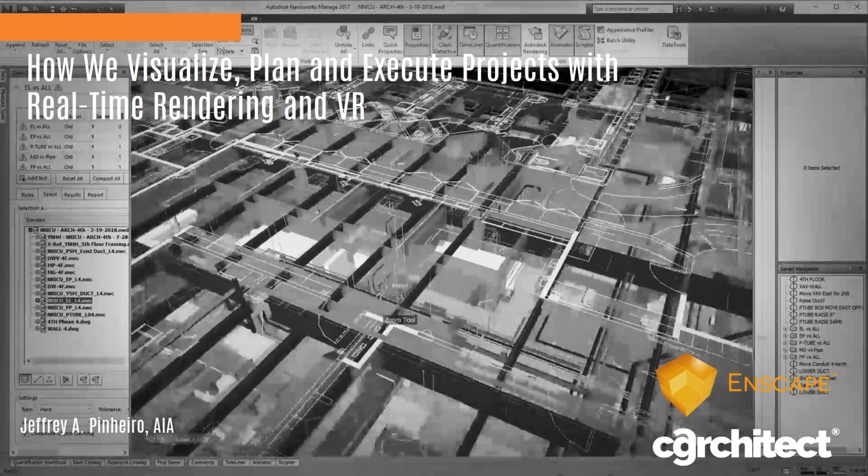So introduction for Jeff. Jeff has 16 years of experience in a variety of roles in the industry. He's a registered architect in the state of Connecticut, and he currently holds the position of regional VDC manager at Turner Construction. Many of you may also know Jeff as the Revit Kid, which is a worldwide online resource for all things Revit and BIM, and through his BIM After Dark community.

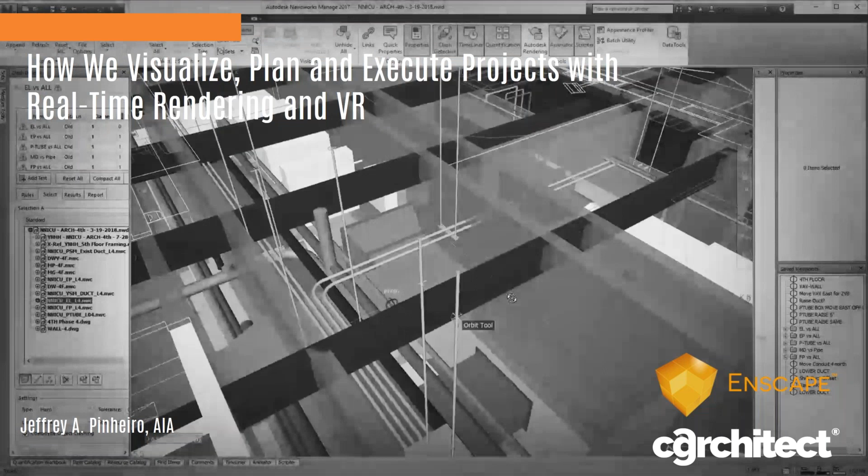Well, thanks everyone. As Jeff mentioned, this is kind of a follow-up almost to the presentation last November. If you haven't checked that out, check it out. That one was heavily placed on VR and virtual reality, but this one is going to be neat. I think a lot of people will find some value in getting a better understanding of how we, as a construction management company, are actually utilizing real-time rendering tools, including Enscape.

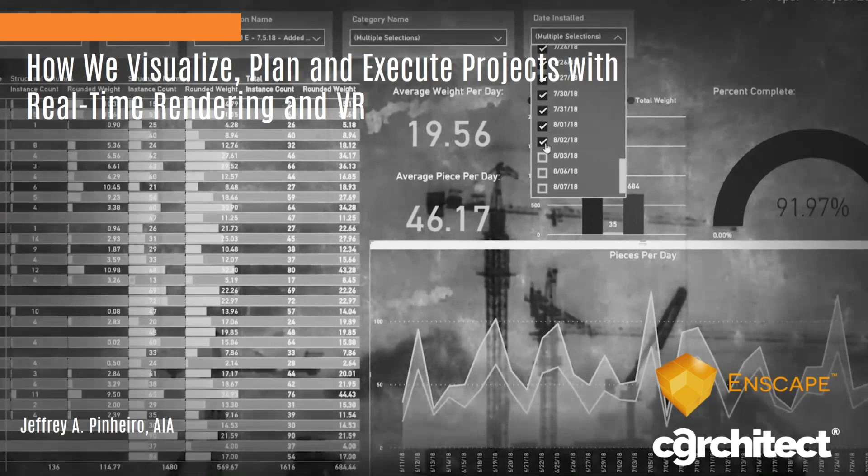And I do want to apologize ahead of time. Of course, luck would have it, I'm getting my roof redone on my house, and because of weather, they're doing it today. It sounds like they're on lunch break, so I'm hoping that they stay on lunch break. But if you hear a bunch of banging, I'm okay. I'm going to try to keep the microphone low and keep my mouth close to it. So I apologize, but this is the world we live in, working from home, right?

Just a quick little overview on myself. If you guys don't know, Jeff did a great introduction, so thanks for that. As far as my background, just to give you a little bit of understanding of where I come from and how I got to where I am today - as you can see, I have a master's of architecture. I'm a registered architect, but I did, in my past, take a minor in construction management. So there's always a piece of me that understood the value and was interested in not just the designy, visual side of architecture, but also in the construction management and business side of it.

As far as what I've done over the last 16 years, I was fortunate enough to go to a vocational school. I studied architecture in high school, and I actually started working at a firm in high school. So I've actually only ever held a job at an architecture, engineering, or construction firm my entire life. I think I spent maybe 2 weeks working with my father at an auto body shop, and that was it. So kind of a unique experience.

As Jeff mentioned, I'm the regional VDC manager, which we'll talk all about throughout this presentation, but it stands for Virtual Design and Construction. I'm an adjunct professor at the University of Hartford, 6 years running, which is awesome. And then, of course, as Jeff mentioned, I also run RevitKid.com, which is over 11 or 12 years now we've been doing that. It just rolled over, I think, the 12-year anniversary, and I completely forgot about it. And then also, I've been hosting live online YouTube streams every week since the beginning of the pandemic. So we're on week 40-something now. Check those out, it's called BIM After Dark Live.

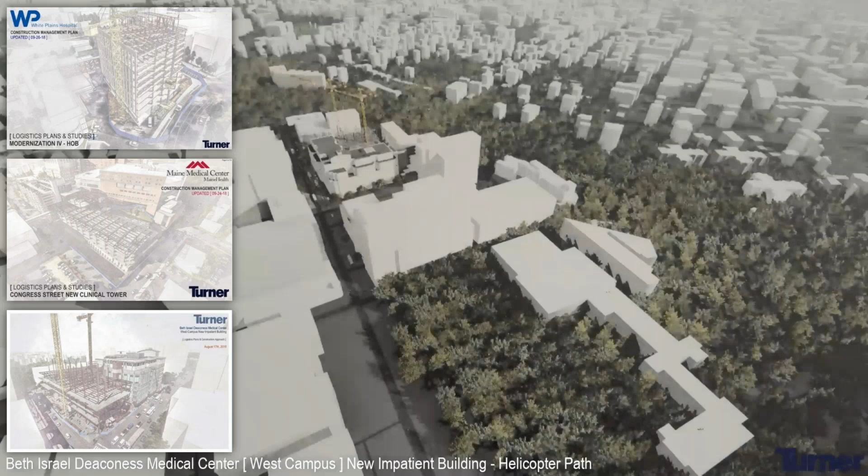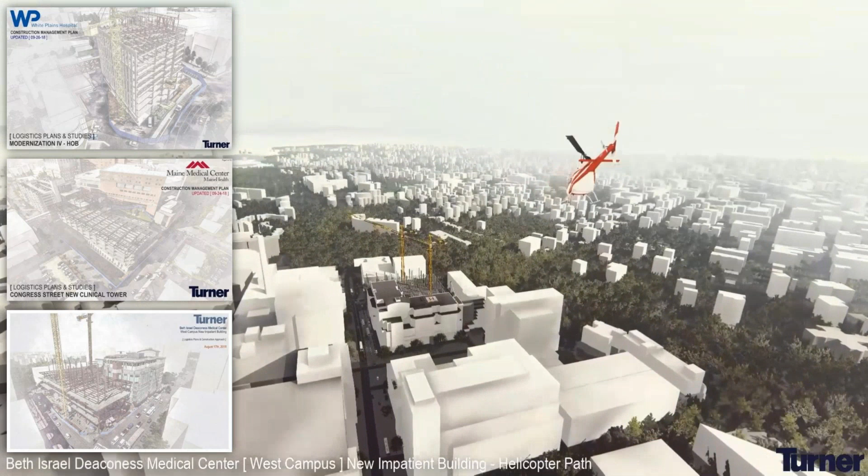So a big chunk of the focus today is on logistics and planning. For anyone who doesn't know what a logistics plan is, maybe you've seen something like these - not the animation of the helicopter, but on the left-hand side, these are called construction management plans. These are actually required by a lot of towns and cities we work with before we build - the submission of a construction management plan.

Usually they're narratives, very long narratives explaining phases of the job and all kinds of important information. But what we do is supplement those with images. The video you saw was an animation we made showing the helicopter path based on the two tower cranes we were putting on a job outside of downtown Boston.

These are used for so many different things. They're used to explain to the city or town what it's going to look like during this phase, or to talk with subcontractors about pricing and coordination between crews, and to highlight really important things.

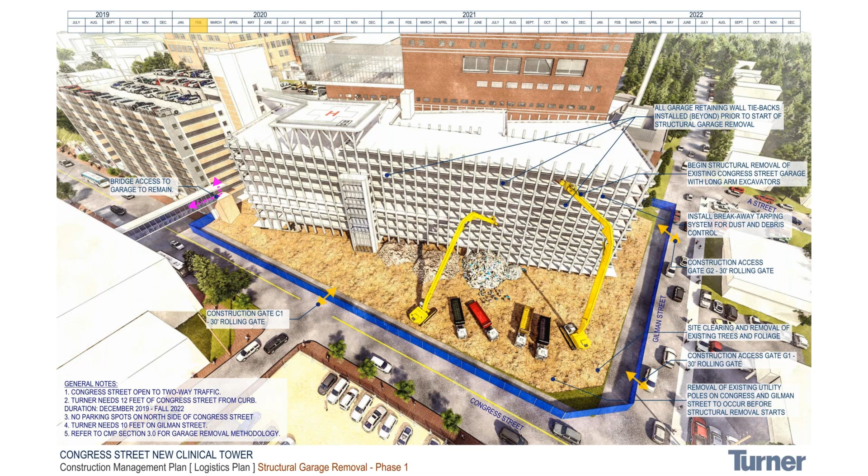You can see within the general notes here, this is actually the demolition of an existing garage that's making way for a brand new building, and there's a lot going on here.

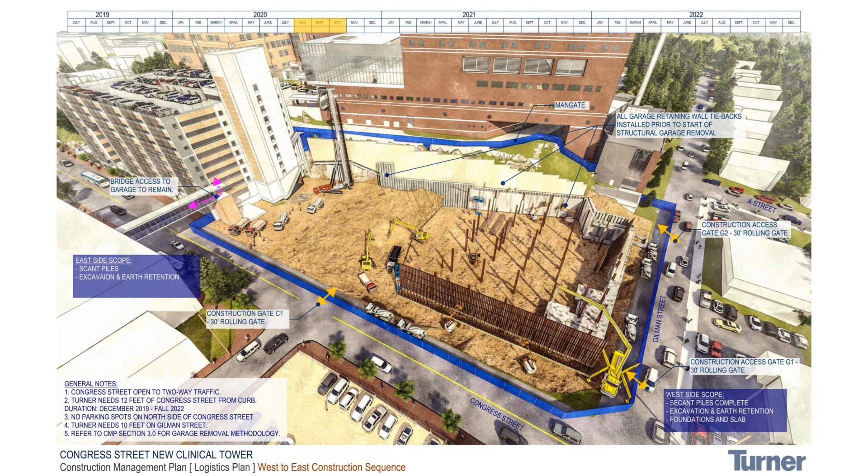Since this is an Enscape hosted webinar, the images you'll see, especially in logistics and planning, are from a variety of software, from Twinmotion to Lumion to Enscape. I want to focus less on the software and more on what we're generating. Then I'll do a quick demo showing how over the last couple updates, Enscape is giving us features we didn't have before to create images like these.

Here's some images as I walk through this building, just to show what these look like. They're really just big pictures at moments in time showing things like fencing, egress, access, constructability, sequencing, just highlighting all the important pieces. They really become the communicating piece of a construction management plan.

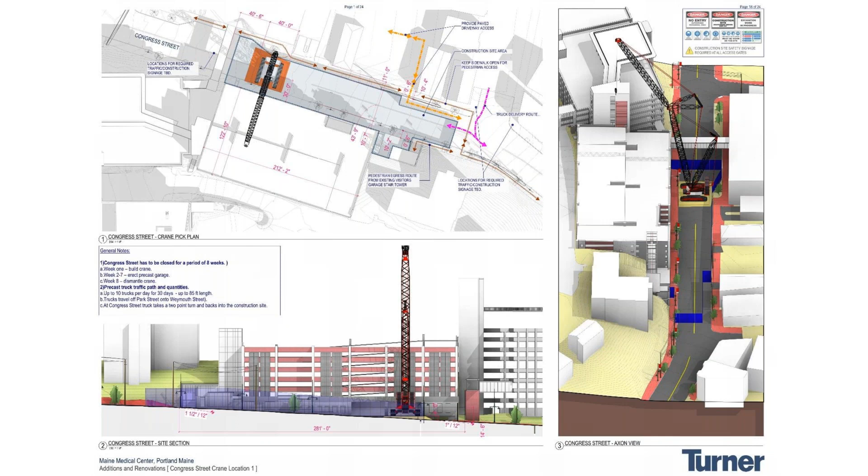This is when we temporarily take over a street for this crane that's going to lift stuff on top of this garage. Here's a section, a similar type of drawing showing all kinds of cool detailed information. Look at the size of that crane, by the way. This is pretty neat - we're actually building two levels on top of an existing garage of a new garage.

Because there was an existing garage and it's precast, it's obviously pretty heavy, so we had to go with a ridiculously large crane to make this happen. What we're showing here is dimensionally how we're going to make the pad and what this is going to look like.

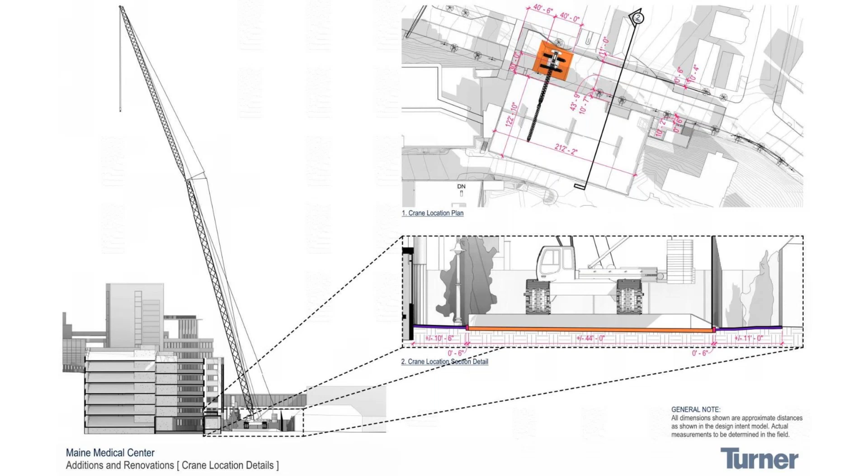This is explaining what most people, if you talk to a contractor, they'll just spit out in words, and a lot of people don't fully understand or comprehend. What's neat is, if you're an architect, you can start seeing the correlation between what we've studied in school and honed in our careers, and how that relates to explaining extremely complex things in more simplified visuals, or maybe in one visual.

Some egress and access issues, and then we can zoom in to show more detailed logistics to the actual addition of this building. This is a YMCA down here in Connecticut, so you can see an idea of what these images look like.

Pretty cool, right? All of this is really just to show you what we're trying to produce, what the end goals are, and some of the different variations we take to get there. You can see they have a pretty similar format.

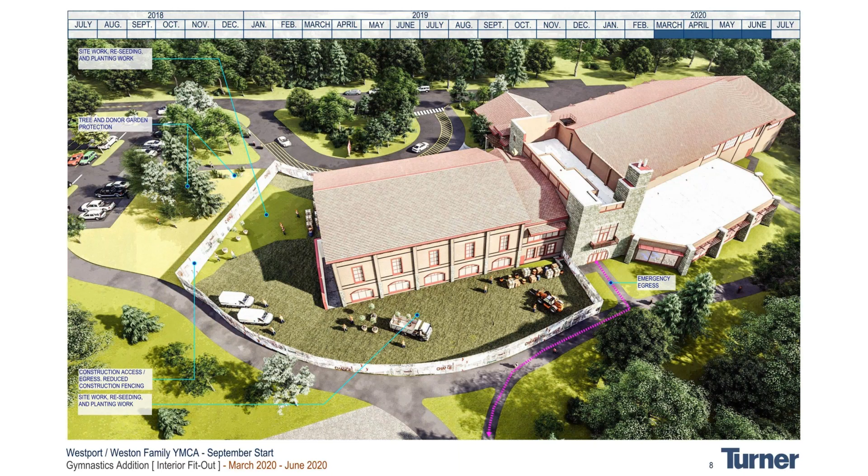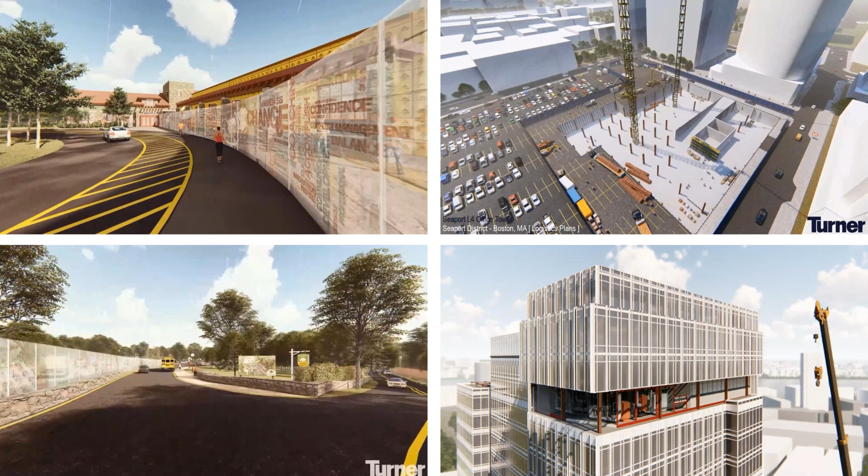Depending on the job and what's required, we also have to do videos to help explain it. The top left and bottom left are great examples of videos used during presentations with YMCA members, or staff, administration, and parents for the school on the bottom left, to show them what it's going to look like when they enter the building for the next 2 years. You can imagine that's extremely important to people.

Anyone who's ever been through a construction process, for example, maybe you had work done on your house, or where you work there was construction happening. Without knowing these things ahead of time, right? A lot of times it's shocking to figure out, oh my God, there's gonna be a fence this whole time. I have to go this way, the noise, all that stuff. And so being able to communicate this to owners, building occupiers, stakeholders, etc., is huge.

And so, that's how these tools are coming into play. You can see all of these tools here. All these videos here were Lumion and Twinmotion. You could see how real-time rendering plays into it. Not to mention the fact that they change all the time, right? As I showed you in those images before, things are changing all the time.

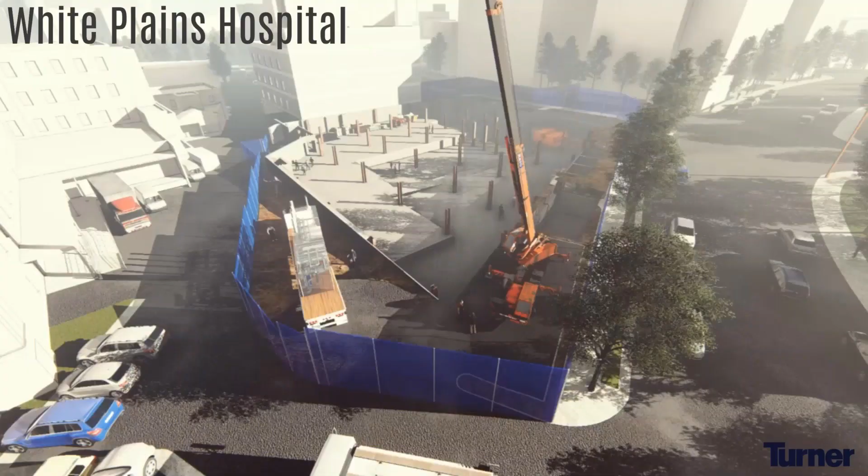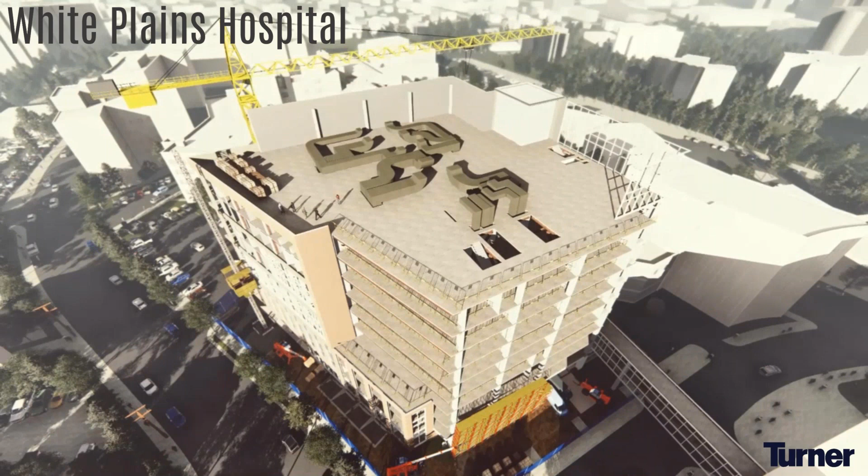This is just a quick example of an animation highlighting the concept of prefabricating the mechanical systems in the basement of this hospital, as well as the mechanical systems on the roof of this hospital. So these are all prefabricated off-site, and really this was just more of a fluff piece to show and explain our concept. Obviously they weren't dropped from a helicopter way up in the sky, but it showed how unitizing a building works and became B-roll for talking through it.

But either way, as you can imagine, these are animations, these are visuals. As anyone who's worked with creating architectural visualization can see, this is where all this comes into play. The biggest difference is that these things are changing all the time. Literally all the time. Maybe if you're doing an architectural rendering, you have 4 or 5 renderings because you're showing a couple different materials, a couple different design options. But at some point in time, that thing is quote unquote locked in, and that is the image, right?

Here, through the life of this job, we are constantly updating these images, visuals, and multimedia presentations as the job evolves. And so where real-time rendering is coming into play now, especially, is being able to quickly manipulate, change, and show these evolutions of the projects throughout time. Just a couple examples I wanted to show you, because these are larger projects in more urban areas, for Connecticut, I should say. And again, this is just an evolution of what you saw before.

These are logistics plans showing different phases of a job. But a great example of how we're tying this now into real-time rendering is how we are using live models now to show this. So instead of spending the time producing videos and images and photoshopping and Bluebeaming the notes or Illustrator, depending on what we're using, instead of spending all that time in post, because this is such a rapidly evolving process of the job,

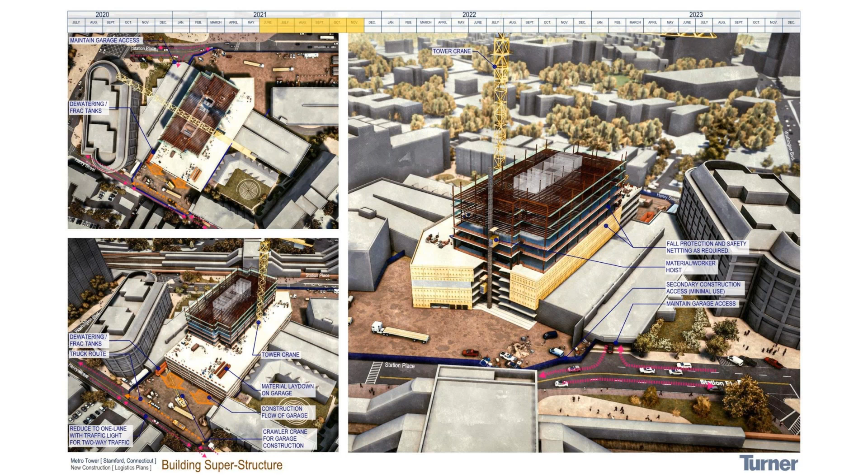we're finding that real-time visualization gives us the ability to, instead of producing these, just open up live models or give our team access to the scenes themselves and flip through the sequences. So now all we're doing is making sure those live models are up to date instead of spending half a day or a whole day rendering 35 images, photoshopping 35 images, and then bringing them into a Bluebeam or an Illustrator document to note up. So that's huge. I show this example and the other example because this is the old way, and here's an example of the new way.

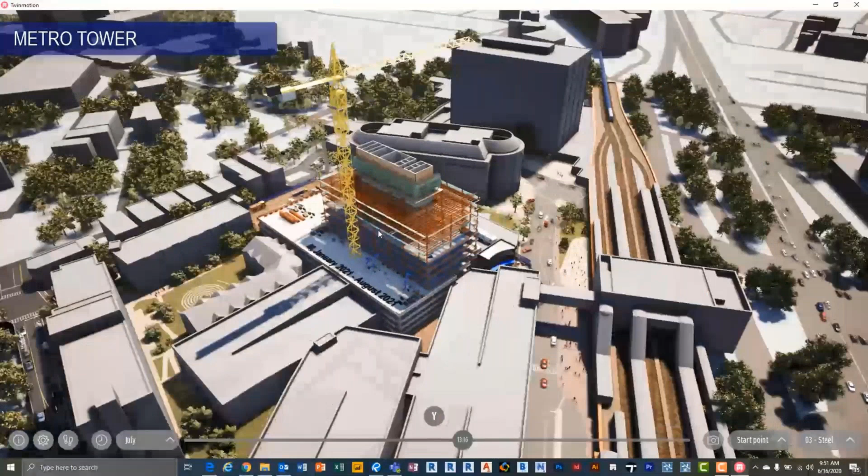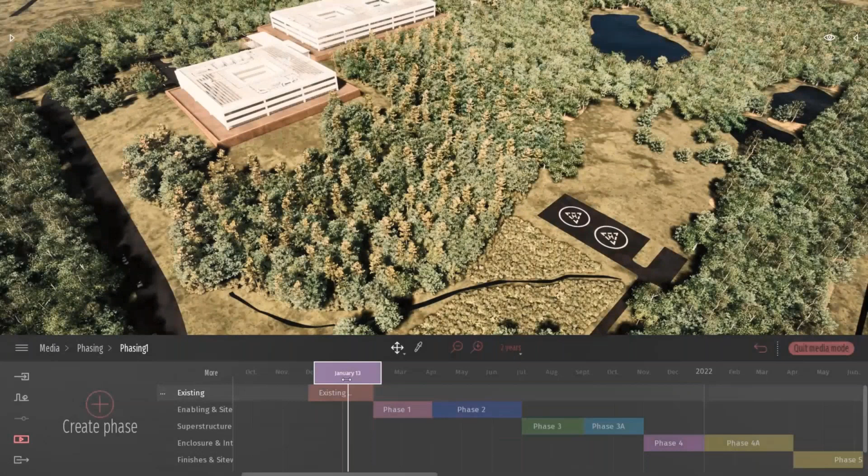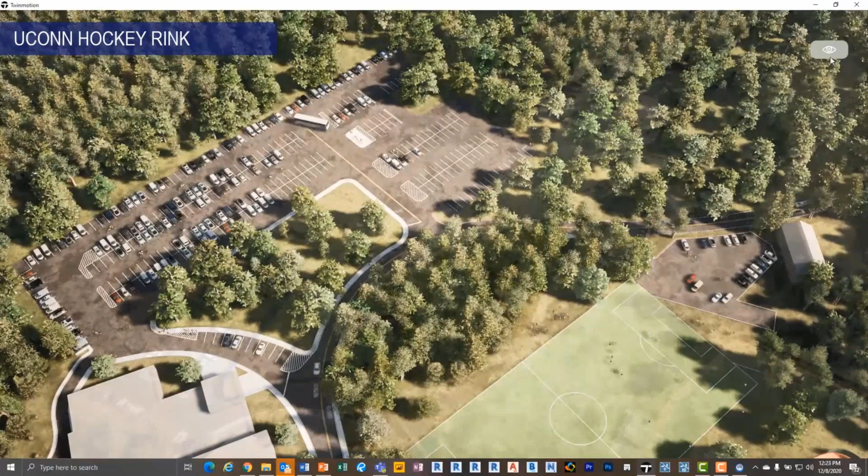As you can see, most of the examples here are Twinmotion, but I'm going to jump in and talk a little bit about how Enscape is helping in this process, or new features to it. So this is an example of a live model. You can see these are fully orbitable, explorable live models that we can flip through. We can go back and forth between phases. You can go to any view you want, just like a video game for anyone not familiar with the software. It's giving us the ability to have end users interact with the models and not have to do that whole post-processing.

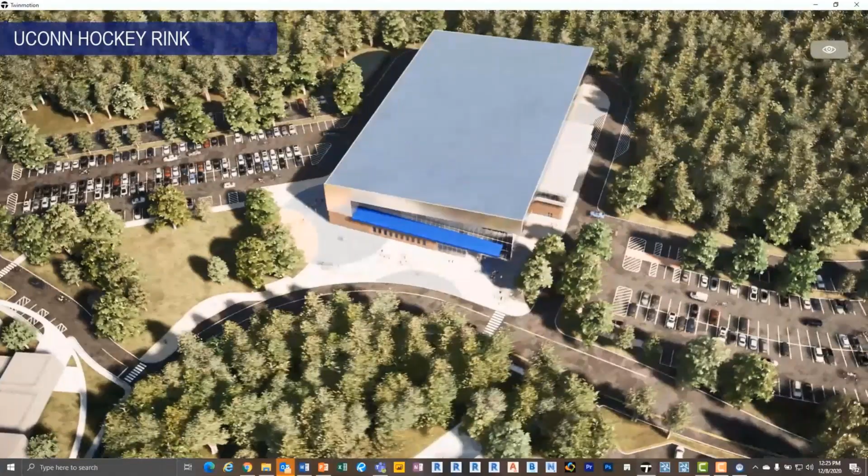So the future of the images and videos that I just showed you is what you're seeing here, which is not actually creating any images and videos, which is awesome when you think about it, right? Because real-time rendering is getting to the point where what you see is what you get, and there's not as much quote unquote rendering involved, you can do things like this. And so this is just a roll of a whole bunch of projects.

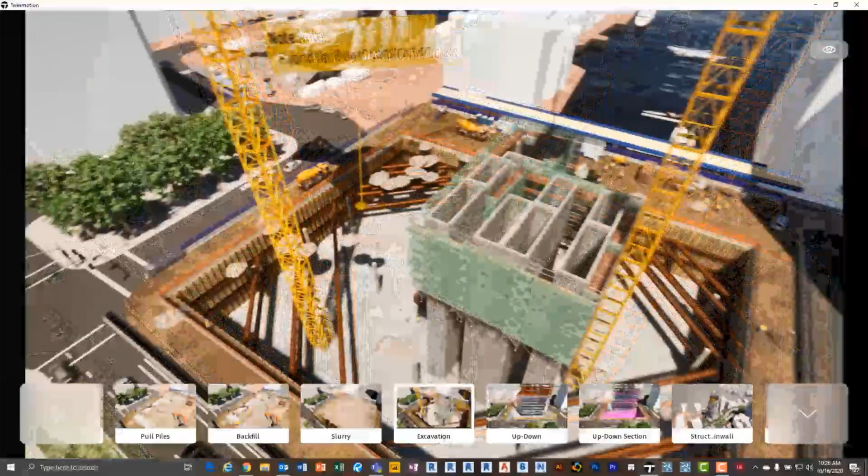This one is actually a really cool project. This is a 40-something story building in Boston. The end scene is really impressive just because I love the way it looks in real time. But you can see the complexity of what's happening. We're showing up-down construction. We're showing sections. We're showing all kinds of stuff. And all of this is happening in a real-time model.

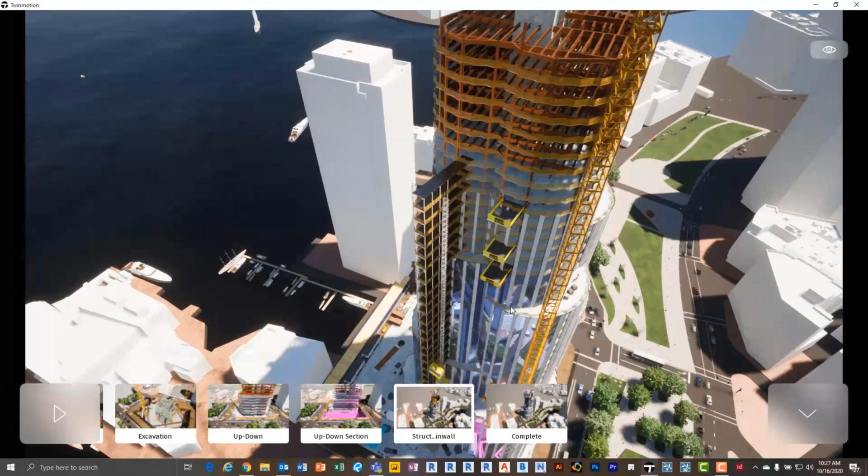So if I sent you the link to this model or the actual scene to this model, you would all be able to do this. You'd all be able to flip through, fly around, and do whatever you needed to see within those scenes. So super cool. And that is really sort of the holy grail of these images.

So what that brings me to now is also, because of what we do, I find myself constantly trying new software, trying new technologies, and figuring out which one makes the most sense for us. And so, right now, the main three that we use are Lumion, Twinmotion, and Enscape. And they've all been kind of segregated in that they all do a couple things really, really well. They all kind of have the same functionality, right? But there's some things that some are better at than others, right?

So one of the reasons we didn't use Enscape for a lot of the logistics images that I showed you is that things like large forests, I mean, you saw the context that was involved there. Those things can be kind of hard to build, especially before. They were really hard to build in Enscape because of the placement of large objects, the manipulation of them, using them within Revit, et cetera.

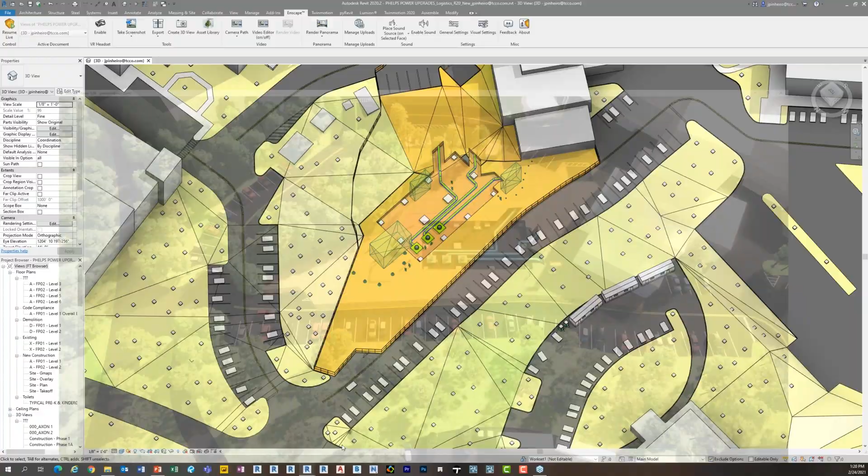So right here is that Enscape scene. This is a live scene, right? So this is a live scene from the model. Okay, and you'll notice now all those boxes are trees and cars and stuff, right? And so that's one of the things that really helps us moving forward if we want to utilize Enscape for some of these larger scenes.

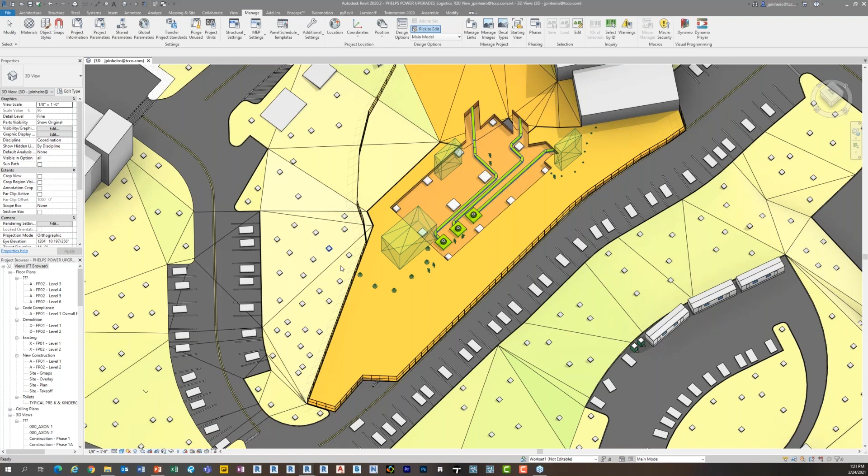So what that is, is if I was to quickly pick on one of these, I'll show you what this is. So you can see all these boxes. These are placeholder objects. So these are simple little components. See this here? It's called a placeholder tree, tree 2, tree 3. And then over here we have placeholder, and they're just site elements. So they're just rectangles built as a family. And then they have their own types, car, car 2, car 3, car 4.

So what's really cool about this is now in the Enscape asset library, first of all, a nice thing about it too is you can actually download the whole asset library.

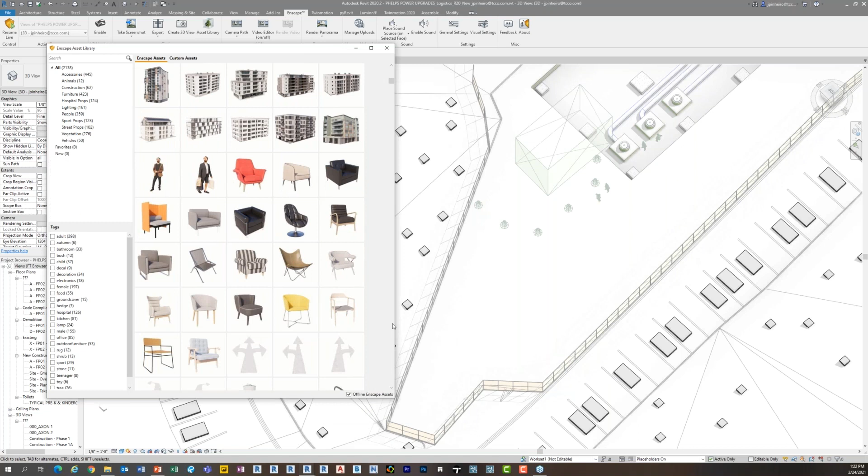So anyone who's used Enscape in the past and hasn't used it recently, and who's struggled with the whole scroll and wait, scroll and wait, scroll and wait, that doesn't exist anymore because there's a little checkbox here. You can see it says offline assets. That means that, as you can see, they're loading really, really fast, which is super cool, right?

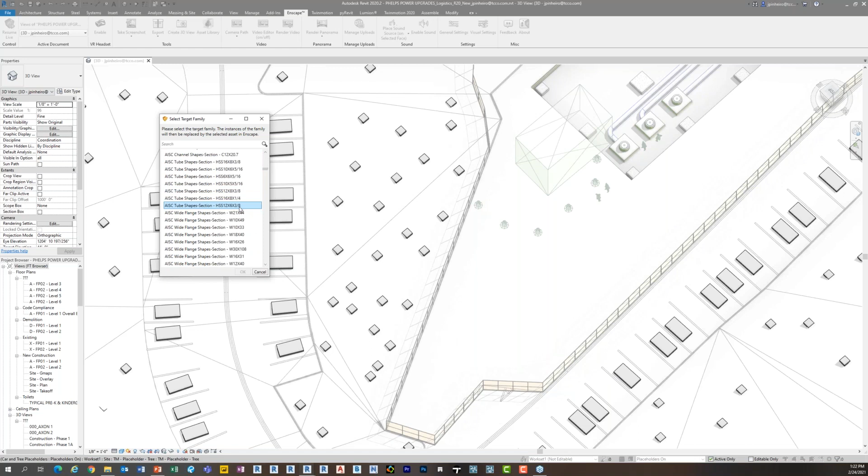All right. So if I go to trees, for example, now any one of these trees, if I wanted to, I can click the little 3 dots, and there's a little button here that says link Revit family to asset. So if I click that, it's giving me an option to actually link that Enscape asset to a family, literally every family in Revit. So what does that mean? That means that each one of these tree types I have here is linked to a tree, right? One of these trees here in the assets.

So I don't have to manually click this and place these trees. As you can see, I mean, look at the process right now. It takes a little while to load the asset. Once it's there, you can click it, and then you can go through. But that process was always extremely painful. And then you also have these big blobs that can be a little bit of a pain in the butt depending on what you're working on.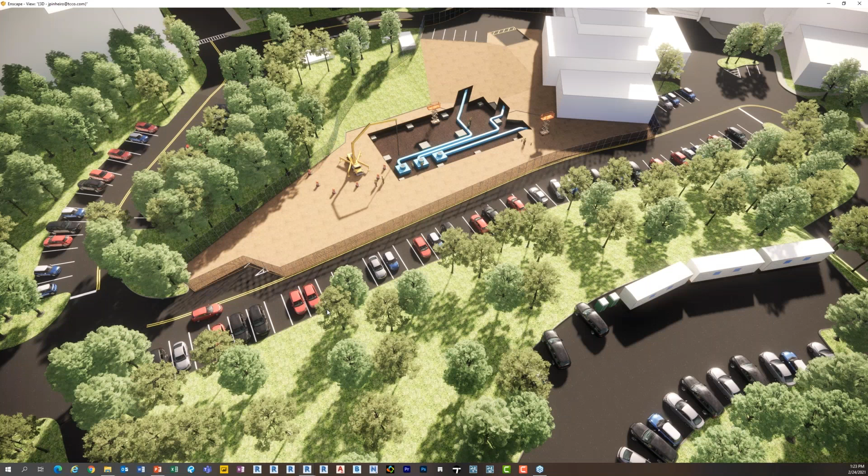So one of the tips that I want you to take away is simply making some sort of placement or asset, and I'm using site here, so that it goes with the topo or the floor in this case. And then all you have to do is make a type, and then you could link that thing to an Enscape asset. And so that's why instead of seeing blocks, when you look over here, you're actually seeing the Enscape cars. Or over here, with these trees, I just have 3 types of trees, and I can quickly place them, and they also don't bog down my model. Granted, I'm not making construction documents out of this model, but if you are, you don't have to have these big high poly options.

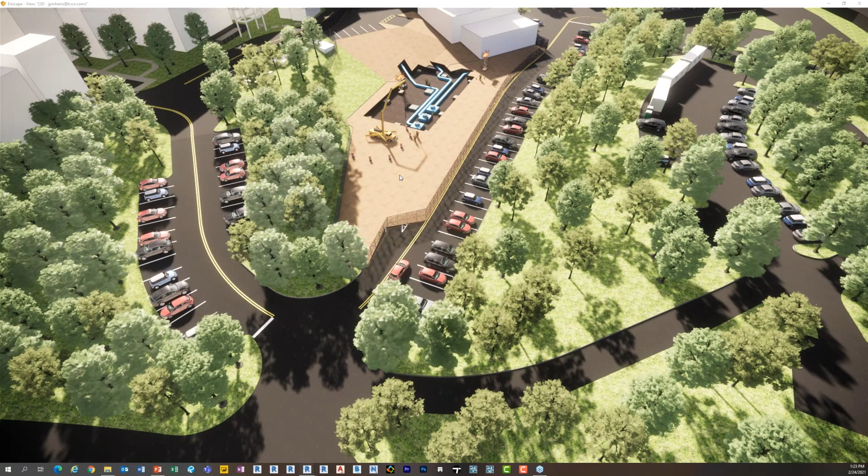The other thing that really sort of messed with us when it came to what we do with these programs is we were limited to either Revit content or Enscape content, and it's whatever existed. So if I zoom in here, you'll notice there's these 3 big blocks sort of around here. But if I zoom in further, these guys look like them. So for a long time, and still, there's not a lot of, let's say, construction equipment in the Enscape asset library. Let me just open the asset library again. I thought I kept it open.

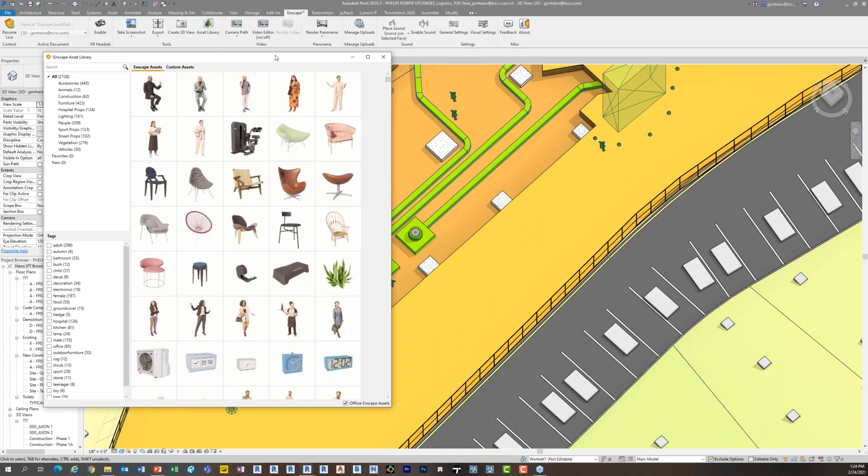And so, we have these libraries, as you saw from those images. We do have libraries from all over the place of construction equipment. And those libraries come from anywhere from TurboSquid to Revit to BIM object to even the SketchUp warehouse, right? And we have libraries that are built into Lumion and Twinmotion, for example, and we're able to quickly place things like concrete pump trucks and lifts and lulls and all these random things that most people probably wouldn't care about if you're doing architectural visualizations. You'll notice though, there's a new custom assets tab. And this is super, super cool.

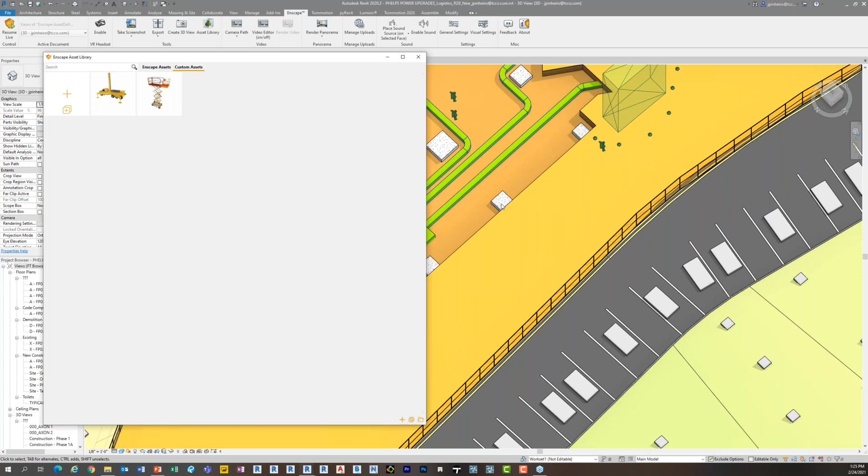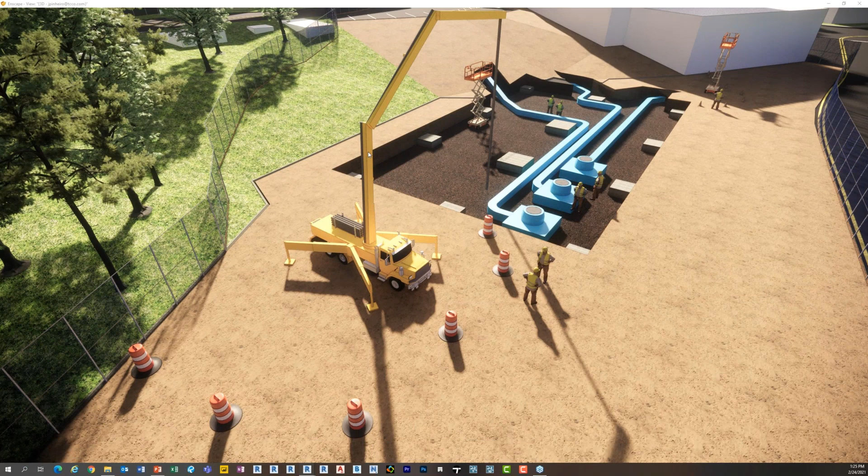So what we're able to do now is take some of those objects from those libraries and actually load them into Enscape. And so if I zoom in here, this guy here, let me just zoom in a little farther there. Oh, too far. There we go. This concrete pump truck right here, and the lift that you see in the background, right? Those are objects that were brought in directly. I didn't even make those. Those are ones that we already created for Lumion, I think, in the past. And so I was able to actually bring those in and add them as an asset. So just to show you guys, if you haven't seen it yet, this is huge, right?

Now, not only are you able to bring in custom assets, but you could also even link them to other objects. So for example, if I had a Revit truck that looked kind of like this, but maybe it was just not as much geometry, I can link that to an Enscape asset, but have it look like a truck in Revit. If I have a bookcase or something random that I want to show as my Revit bookcase for my documentation, I can have it launched in Enscape and look like an Enscape asset, which is super cool. But I just wanted to show you the custom asset library or editor here, which is super cool.

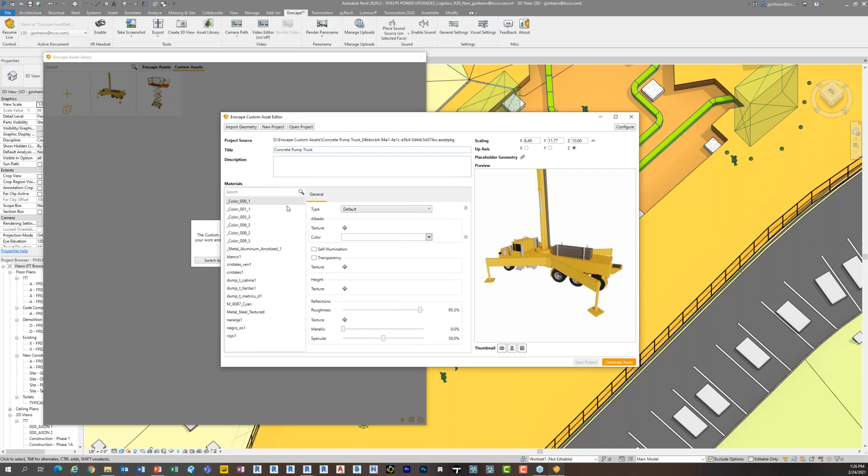And so you could see this one was brought in. I think this was just an FBX or a Collada file. I don't remember exactly, but it shows all the materials. You can apply the materials, you can make changes, you can do all kinds of cool stuff. But it's super simple. You just import the geometry and apply the materials and then click save. It generates an asset, it makes a thumbnail, and then you can place it.

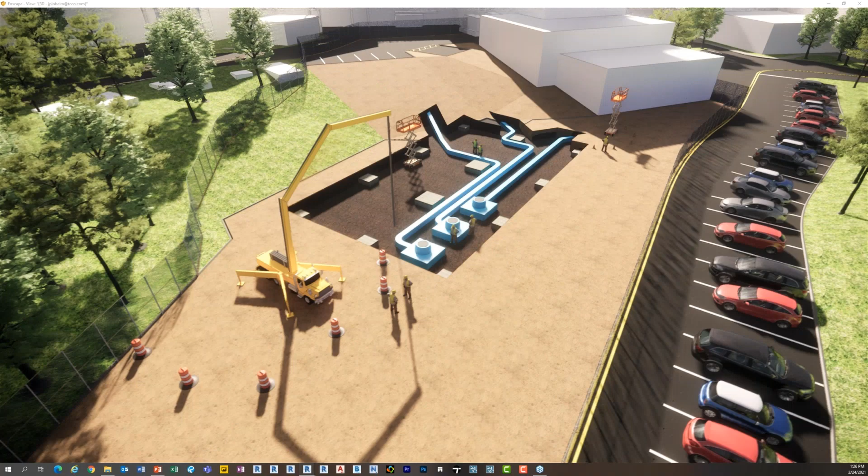So as you can see, that allows you to do things like we're showing here, where you can bring in assets and we can actually start building these type of scenes that honestly were not really possible to build in Enscape only 6 months ago or so. So pretty cool, pretty awesome. I hope those are some helpful tips. But that's some of the ways that we're starting to utilize this for those construction logistics and safety plans.

All right, so let me jump back into the PowerPoint. Okay. All right. So now let's talk about diagrams. Diagrams is cool, and there's a lot of really cool examples, especially for Enscape within diagrams.

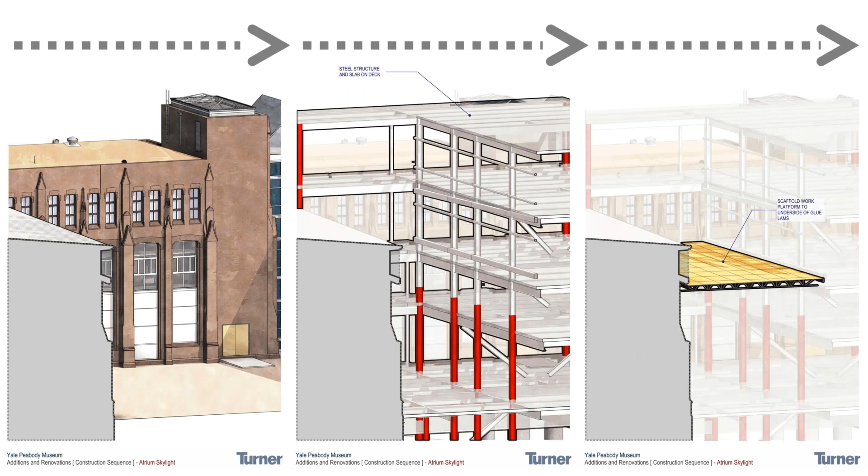And this one's a hard one to pinpoint because there's such a variety of stuff that we use them for. And so I'm also going to credit my crew as well for a lot of these examples. I didn't mention that before, but I didn't personally make a whole bunch of these images. There's a group of 6 of us that have put all these together. And so here's some examples of what some of these diagrams could look like.

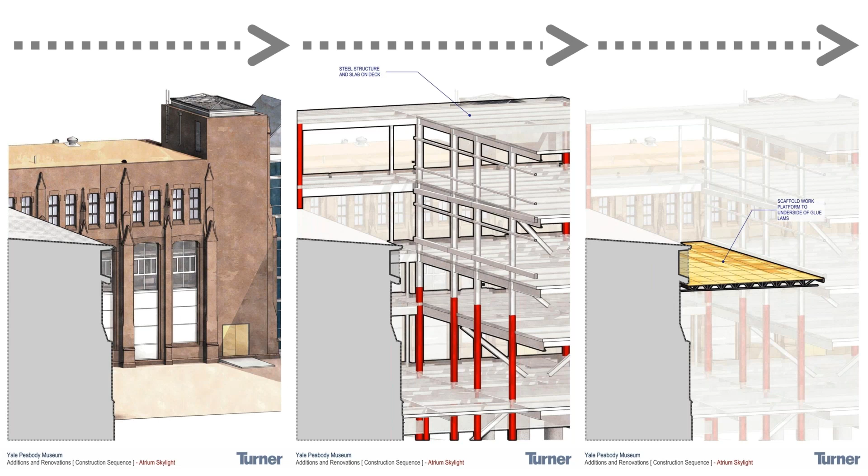So you can see this is a series of 4 or 5 images that, again, I went through pretty quickly. I'll go backwards. If you sat down and just watched these images, you probably wouldn't even have to read a note to understand exactly what we're talking about. Whereas if you imagine trying to write the narrative to that process in a construction management plan, how long that would be and how hard it would be to follow. And so you can see where these diagrams and images really shine. A picture says 1,000 words, but you get the idea. So pretty cool example there.

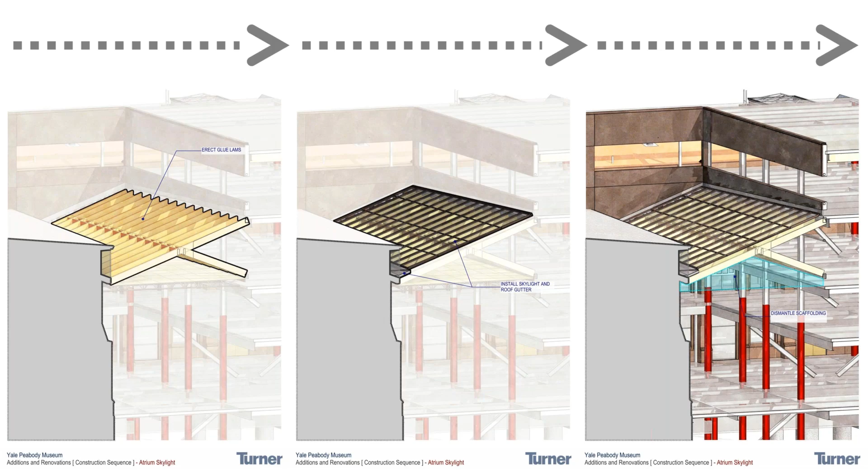This is another great example where we used Enscape, in real-time rendering, to visualize the results of a study that we did, which is a beam penetration study. So on this project, the floor to floor was pretty low for a new building, and there were supposed to be a lot of beam penetrations. And the beam penetrations weren't necessarily called out great on the drawings. We wanted to make sure they were there.

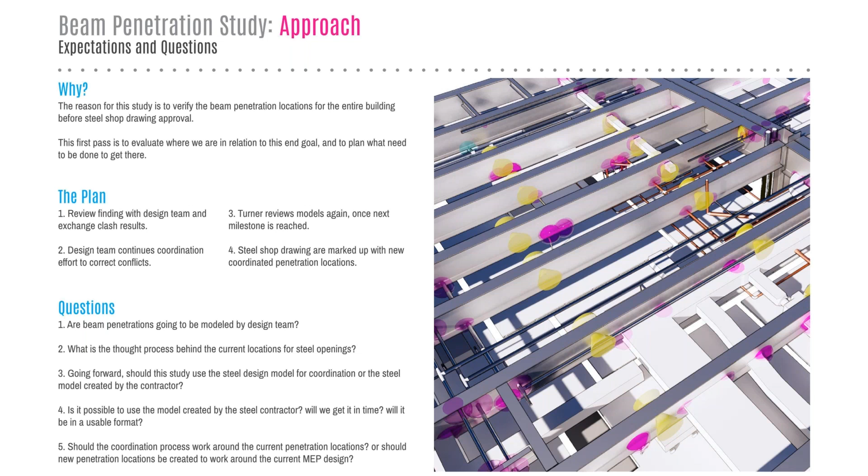There was a cost implication, where a beam penetration put in the field would cost maybe $3,200, whereas a beam penetration put in the factory was maybe $1,000. And so if you do that over a couple thousand beam penetrations, you're talking $3 to $4 million worth of risk. So what we did is we used Dynamo to take clash locations and bring them into Revit,

where you could see these pink bubble gums, we call them, orbs, which basically show you all the clashes. And then we isolated and highlighted the locations of where the beam penetrations were shown on the design drawings, and compared them to those bubbles. So a pretty cool way to look at every single floor and analyze where the risk is, and maybe where we need to add beam penetrations, or where we need to focus our efforts.

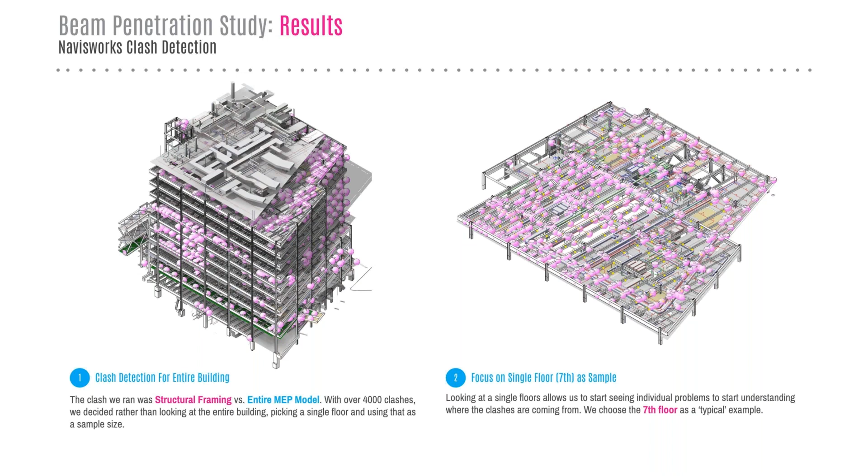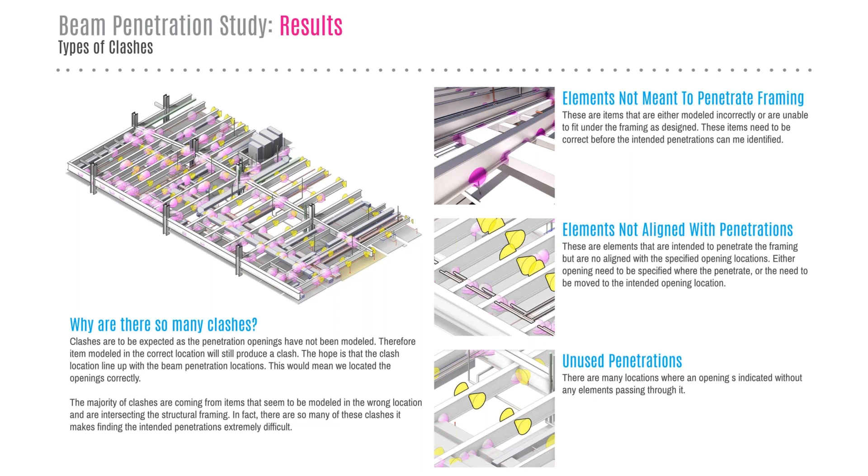But what's neat is you can see all these images, again, very image heavy. And we're using things like Enscape, you see the top image there, to illustrate that to others. And we can spin around in this live for people to see it. So another really cool example of something beyond what you'd think to use a real-time program for. Here's just a couple images showing test pit studies.

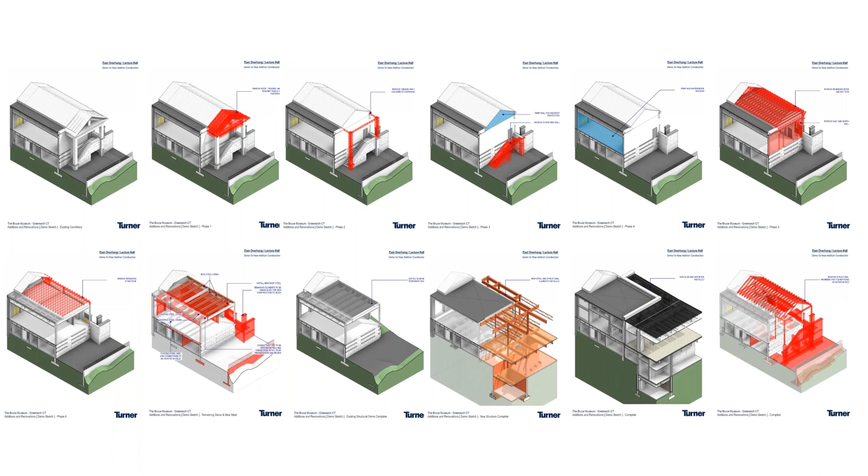Another example here of just showing some rigging. This is a better picture of it. And so you can see here some orthographic views of, again, removal of an existing roof while temporary shoring, while placing on a new roof. And this is really just going through the sequence of processes to show someone how that's going to be built.

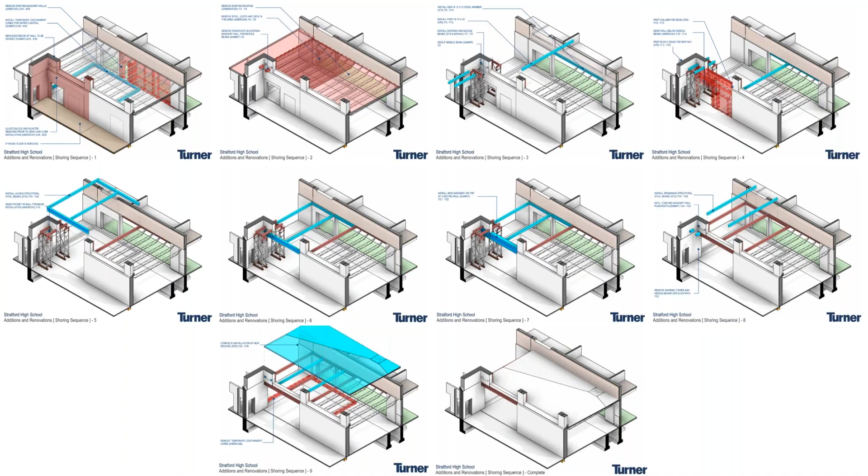And so this could be used to explain to our field staff that are working on the job. It could be used to explain to the actual construction foremen who are performing the job, or it could be used to explain to the designers and the owners how we're actually going to build the job, right? And so there's lots of stakeholders at hand when we're doing these visualizations.

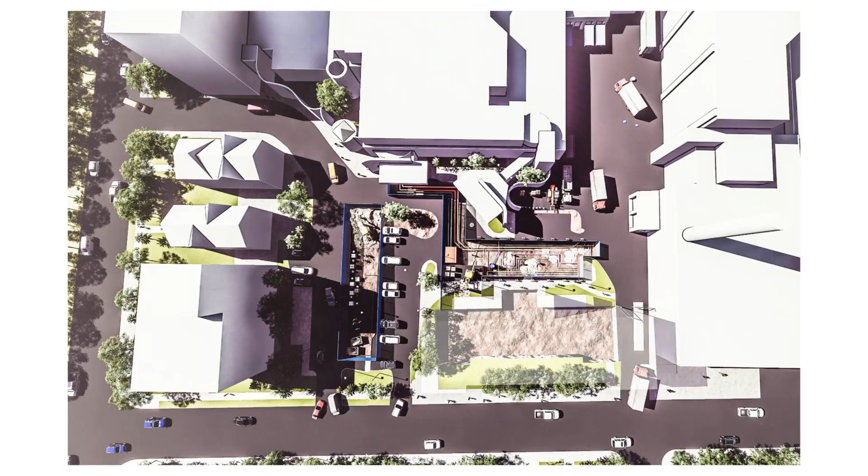But we're also showing a complex phasing. You can see there's a truck up on the top there that needs to get back to this loading dock on the top right, and that needed to stay open the entire time. So we needed to phase it so that we could do one side, then we flip and do the other side, and at all times that loading dock on the top right-hand side was open. So these visuals become extremely important pieces to explain to owners, end users, staff, faculty, whoever, what this site is going to look like from X date to Y date, right?

So pretty cool. And again, anyone familiar with any of these real-time programs, that's what we're using to generate these images. Because again, these things are changing all the time. I'm showing you the final products or a version of them, but I can tell you right now that we've got 10 to 15 previous versions that we did over a series of time, modifying, adjusting, evolving, and adapting.

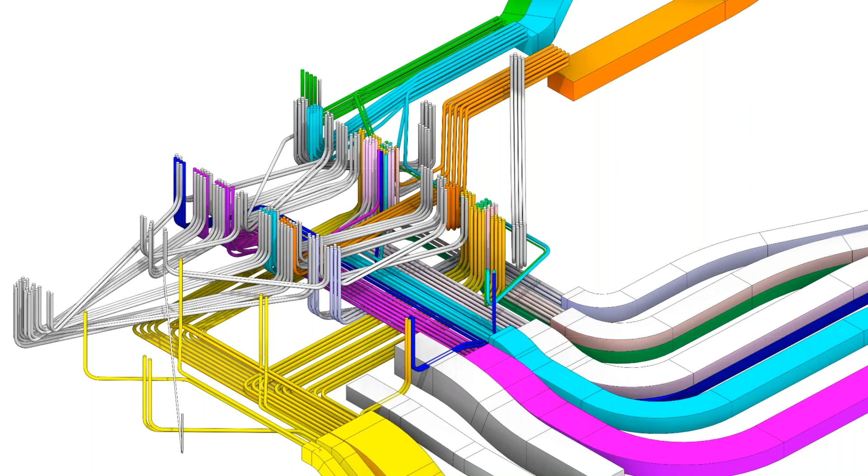Just a little more underground, because I think this is a really cool example of visualization and also using that tool to communicate. This is 371 underground conduits going underneath a new generator that was being placed in. It's hard to tell scale here, but the verticals on those conduits are about 12-ish feet tall. So you've got PVC conduit going up 12 feet, and we were prefabricating the generators that were going on top of these.

And so with prefabrication, you obviously don't have a really big tolerance. You need things to land where they need to land. And so we were given, I think it was like a 1/2 inch tolerance, or maybe even a 1/4 inch tolerance. So imagine plastic tubes that are 12 feet tall, but they have to land at a point with a 1/4 inch tolerance. We were trying to figure out a solution to get that to work.

And so we actually worked with the design team, a structural engineer, and the prefabrication manufacturer, and we developed these steel structures that were laser cut. We laser cut the holes in, and basically we said, okay, electrical contractor, you've got to go out there and just make sure that your PVC goes through these holes. As long as they go through these holes, they're going to land where they need.

This is a really cool example - there was about 30 slides of this sequence by the end, showing how that works and how it goes through it. During that whole time, the views I was showing them were actual Enscape views spinning around the Revit model. This is just the end product of those views.

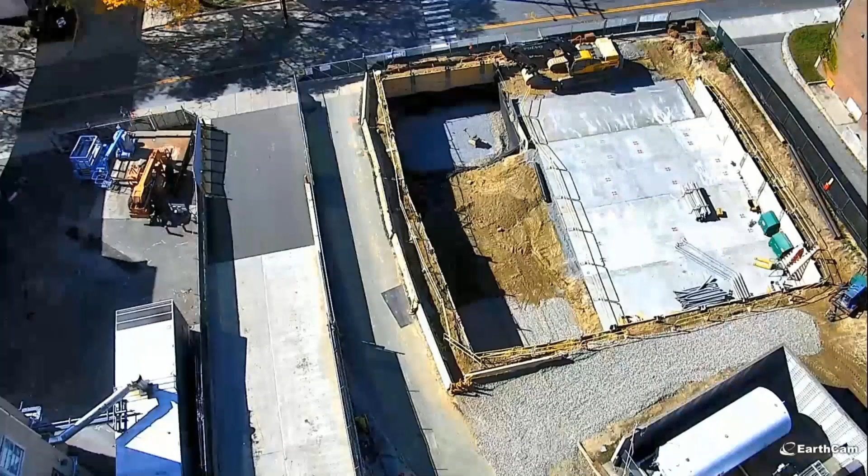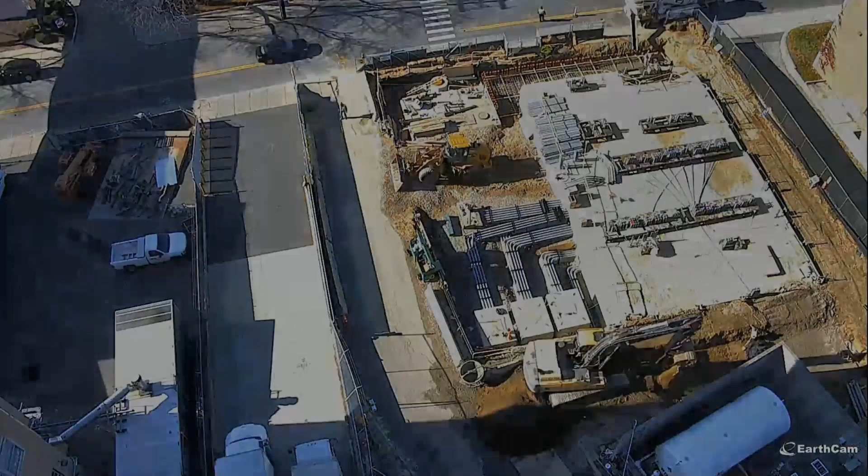Because it's always fun to show a time lapse, here's an example of what that looked like when it was done. You can see them digging on the right-hand side, digging some pads and holes, and then there's our structures, all of our conduit, then flowable fill, then more conduit, then more flowable fill, and now they're almost at their 12-foot height. You can see the final slab, and then they bring in the final prefabricated generator boxes. They connect them all, and they're good to go - everything landed exactly where it was supposed to, which was pretty freaking awesome.

Okay, now we got some more Enscape examples.

With COVID being an ever-present nuisance in our lives, it's the same on the construction side, trying to figure out how we can build projects while also maintaining safe distances and COVID safety measures in place. This is a great example where we use a tool like Enscape to show how we're going to do that in many different ways.

This is showing the sequence of constructing - this is actually just an office renovation. There's a floor above it, and this is one of the floors where they're keeping part of the floor open while we renovate another piece of it. First, we're using Enscape here to show the sequence of demolition versus new versus temporary walls.

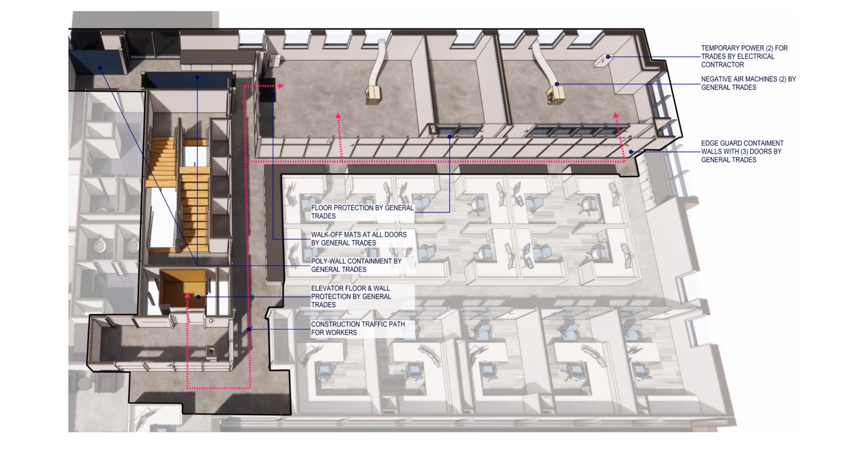You can see the demolition of walls, and here we're showing our edge guard containment, which is a solid wall that's going to be around all the work, and where our entrance and exits are going to be for our workers versus where the existing folks are going to be. Then pulling into COVID times, we also show what type of signage and what kind of COVID measures are going to be in place, including negative air machines - you can see in the middle there.

Because it's real-time rendered and it's all decked out and ready for those images, we can produce images like this extremely fast. So we put these as part of the package.

And then this was kind of the completed office as it was.

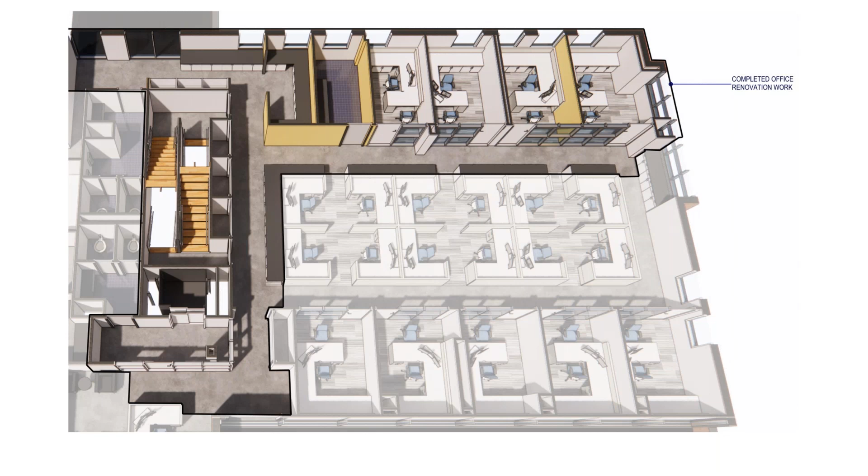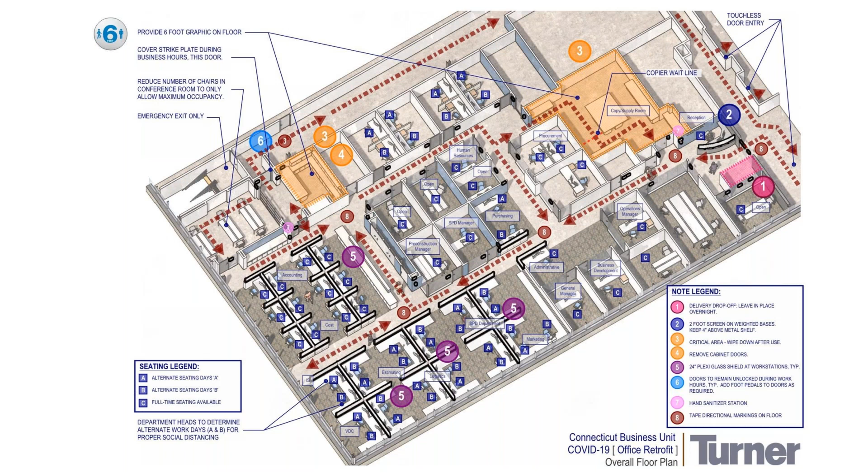You can see we're showing where specific signage is going to be, and we're showing a seating chart because we alternated seating days - it's really just a diagram created to communicate our approach to COVID safety measures. Here's a signage plan showing all the signage across it.

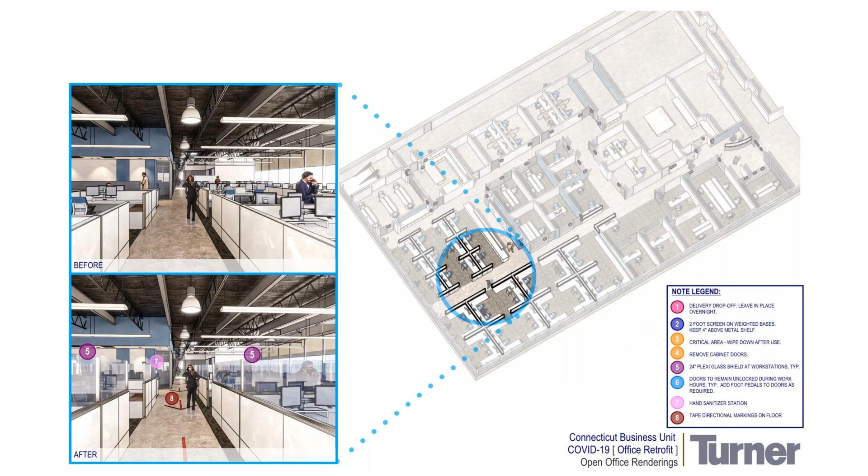The one thing I'll say is all these 3D visualization tools - this includes Enscape, Twinmotion, and Lumion - we've got to start putting assets with masks on, because it's not easy to put masks on these people after the fact in real-time rendering programs. We have a mask model that we just kind of throw around and try to align.

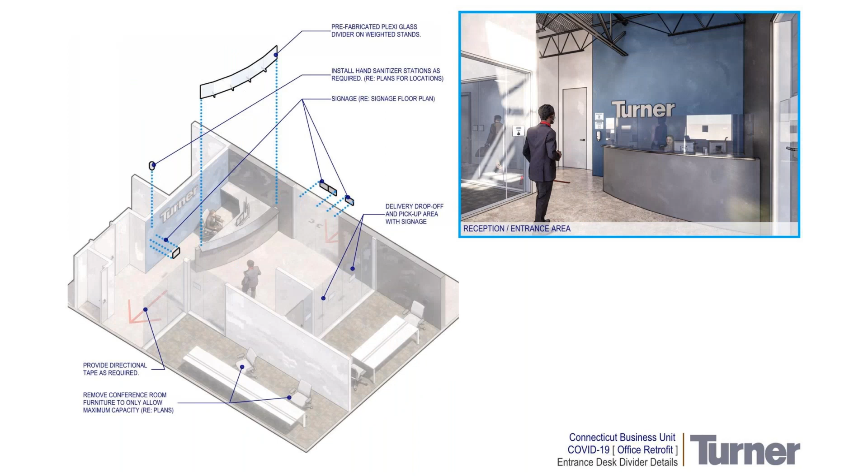Showing the construction of those plexiglass partitions. Again, this is an Enscape image, using displacement views in Revit, and then what it looks like in a rendering - just another way to utilize these models to communicate different things. Same thing here, just showing that plexiglass partition in the front. And then here's a video of it.

I don't know if you can hear the music. Sorry, let me just change that - there was actually music playing, and I don't know if you heard it, but I'm going to turn that off because it was really loud in my ears. Let's go again - there it is.

Okay, so again, because this is a real-time rendered program, it's pretty easy and fast to make even videos out of this.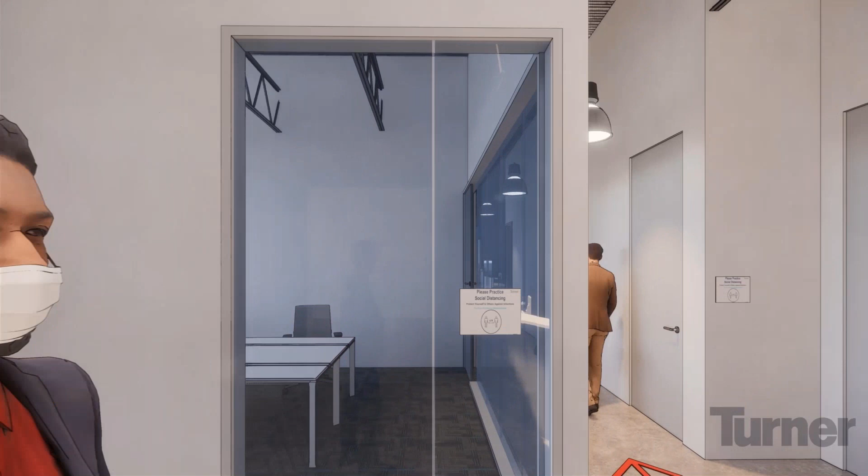So of course we had to present this to the entire office. We went through the plan with management and the whole team involved in the COVID measures. The idea was, let's present this to all 160 people in the Turner, Connecticut office and show them what it looks like. You saw the mask there, almost covering his whole face.

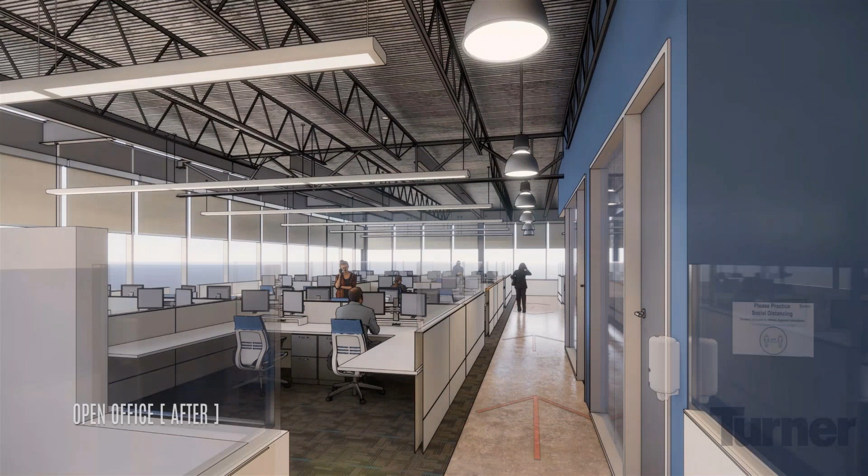Now we're just walking through and showing a bunch of before and afters - these are videos rendered directly from Revit in Enscape. You can see this is existing, and we'll take a pause here, and then show, okay, now here's what it looks like with all of the COVID measures in place.

And then another little panning view to show, again, here's what it looked like before, and now with these 24-inch plexiglass covers, there's what it looks like now. Pretty cool, pretty neat use of real-time rendering, and very timely, I guess you could say.

So this would probably go a little bit more along the lines of what you're more familiar with as far as architectural visualization is concerned, but just another use of the tools that we have, and the value we can add with them.

Another great one, and this one is actually fully Enscape - these are orthos, all fully modeled in Revit. This was great timing for us personally, because Enscape just came out with a bunch of new healthcare assets, and we had plenty of our own, but they had some really nice healthcare assets too.

What we're doing here is helping a hospital we work with all the time figure out what COVID-19 retrofits they can put in place and what those might look like. Again, narratives, working with companies, and then being able to visually show this is what you can put in place, and this is how it might look afterwards - before and afters of this negative air pressure room, basically going into an OR.

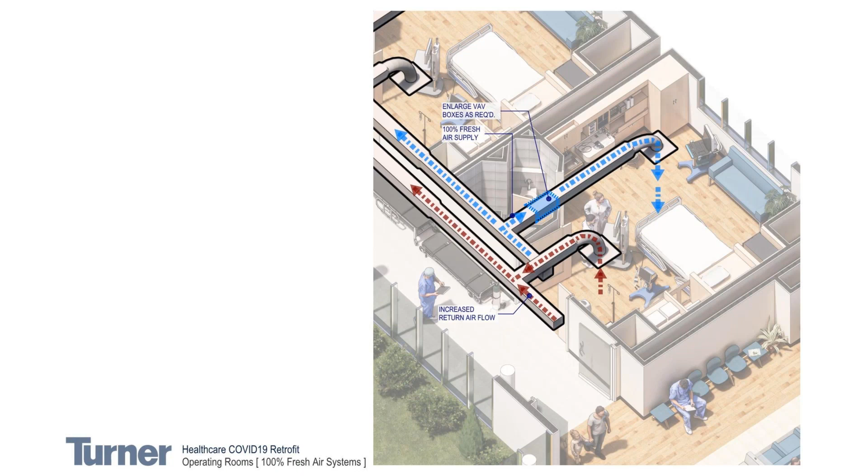This is just a nice little diagram that went along with a narrative showing enlarging VAV boxes and supplying 100% fresh air - really this is just a B-roll to talk to a narrative. But you can see on the right-hand side, those are all orthographic views using real-time rendering programs like Enscape and Revit for the modeling, and another interior elevation talking about some of those.

Again, these are kind of B-rolls talking about O2s and all this good stuff, but these are actually fully rendered images using projects we've had for virtual reality, for example, as sample projects when working with that specific hospital.

Finally, for diagrams, wrapping up, is constructability reviews. As a construction management company, part of what we're hired to do during pre-construction is perform constructability reviews. Usually that's a process of digging through the construction documents, keeping a spreadsheet with item numbers. So if you're the project executive, you might type item number 7: does the level of the new footing need underpinning? Maybe you'll snip an image to show it, but usually that's what it comes down to.

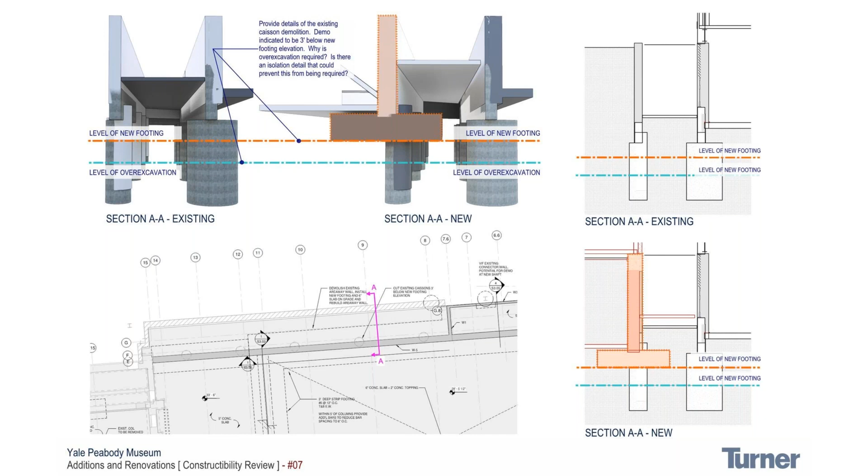Because of the access to the models and Enscape, what happens now is those doing constructability reviews find an issue in the drawings and come to us on the VDC team asking to pull up the model and look at this area. So we make sheets like this one, called Constructability Review number 7, creating quick images to explain those constructability items for that review. Sometimes we use Enscape, sometimes just a snip of the PDF and the Revit model, like what's shown here.

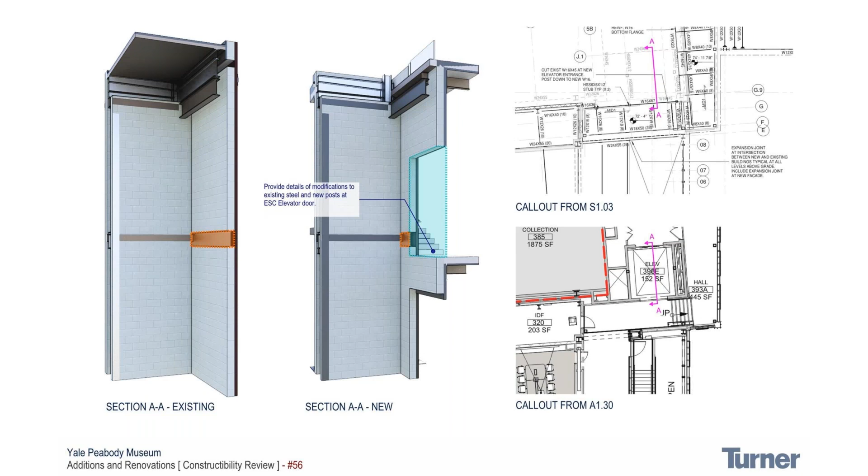Just another quick example of a swing-up door detail, highlighting and showing it in different ways.

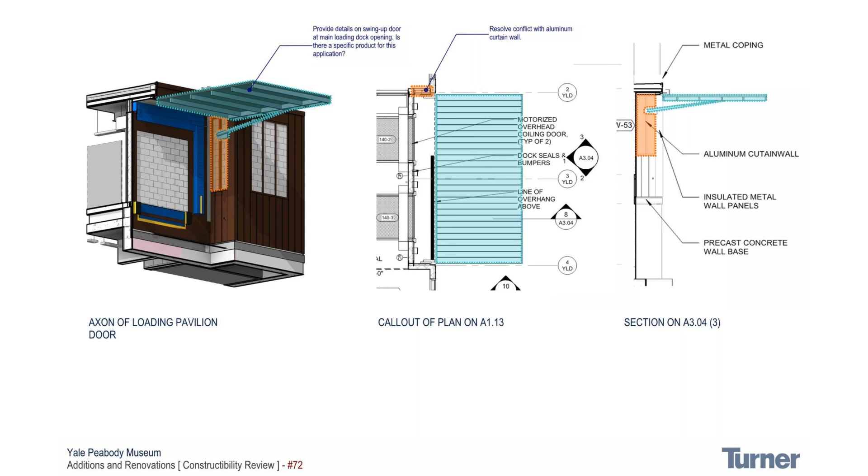We're going to wrap up with a little virtual reality. If you've followed any of my content personally, or attended the last webinar, you'll know that Enscape really came into play for us over the last 4 or 5 years with virtual reality. You cannot beat the one-click ability to jump into virtual reality and utilize it.

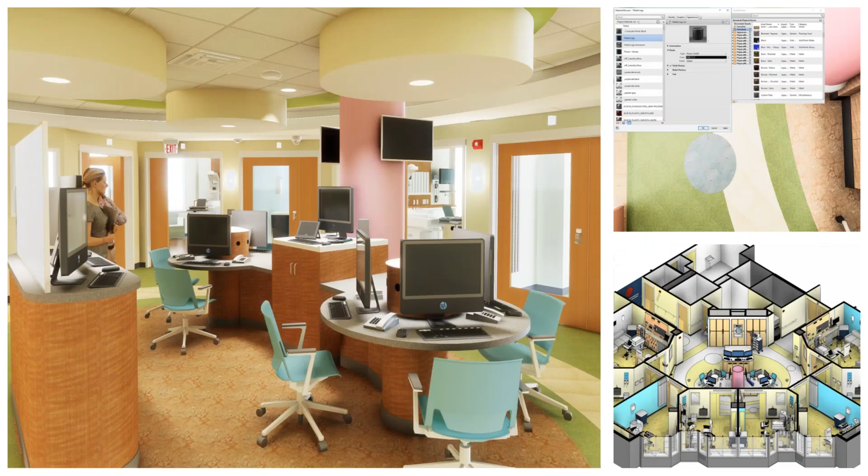I'm going to tell a couple stories here. This is a hospital project in Connecticut, and this was a nurse's station. The thought was: we need the clients to approve this nurse's station and do an in-place mock-up, because there's going to be 8 of them, built off-site, et cetera. So this is what it was: a material board, a floor plan, and a rigid insulation full-scale mock-up. Obviously the clients were not super happy and did not want to make a decision looking at this. So we ended up using Enscape and virtual reality, and this was actually in 2017, believe it or not, which is pretty wild.

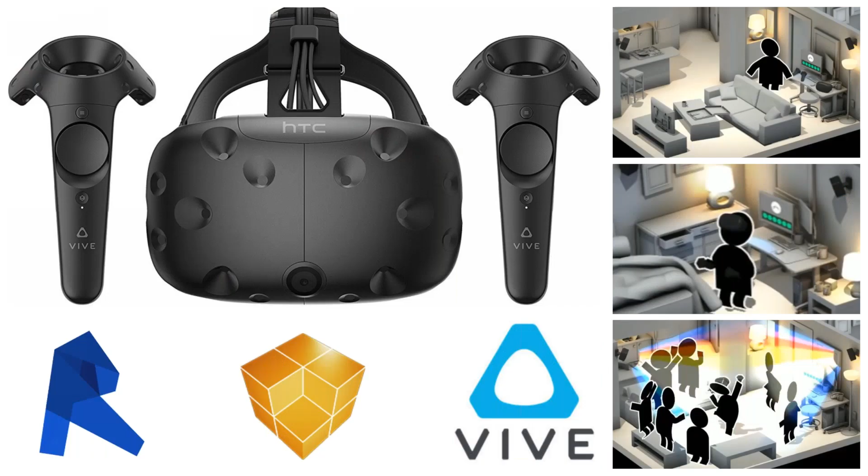This was to do exactly what we were trying to do with the physical mockup, which is get approval and feedback. Enscape became the tool. So Revit, Enscape, and the Vive were the tools we used for this. Why? Its ability to go one click into VR is unmatched, and the quality you see in VR and the simplicity of getting into it from a Revit model is unmatched. You can see here's us jumping into that space, showing what it kind of looks like.

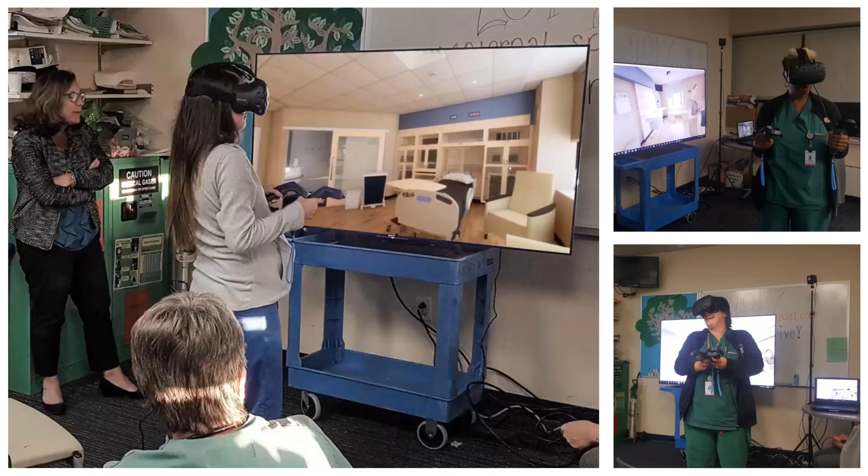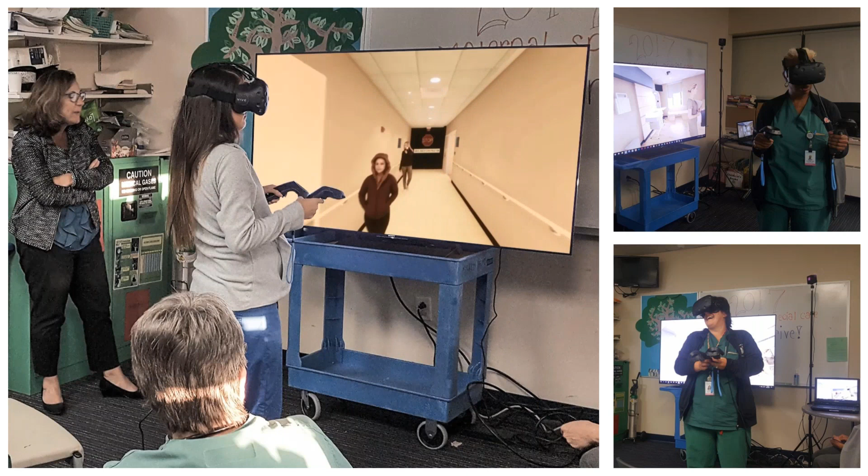So what that looks like for the folks in the goggles - this was an example of that same nurse's station, just to show what it could look like to users as they're walking around. Anyone who's used virtual reality knows there's a little realism and shading and graphical information that can be lost going into the goggles, based on hardware and software limitations. By our testing, Enscape was the one that looked the most realistic.

We went out and had the end users - the nurses, the administration - walking through these spaces and giving us feedback with the design team. We took that feedback and utilized it, and that nurse's station already looks a little different. It went through about 7 iterations using strictly VR. The nice thing is we could quickly tweak it because it was just a model, not built in place. By the end, we had a model everyone was comfortable and happy with.

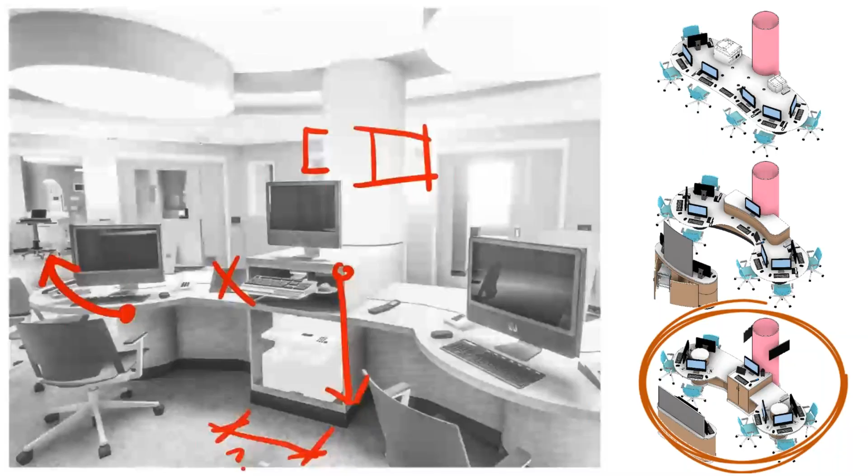So, oops, that just jumped out of there. So I wanted to leave enough time for questions because I know there's going to be a ton of them. So that was just a quick example of some of the VR stuff.

Like I said, I think in general, you can see, hopefully through the examples that I gave today, the wide variety of uses that not just virtual reality, I should say, real-time rendering technologies give us as a construction management company. So that was kind of the goal here, using those logistics plans, those diagrams, the VR example, to really just show you the array of different things we do and how a tool like Enscape or Lumion or Twinmotion can help us do those things. So hopefully that is eye-opening for you.